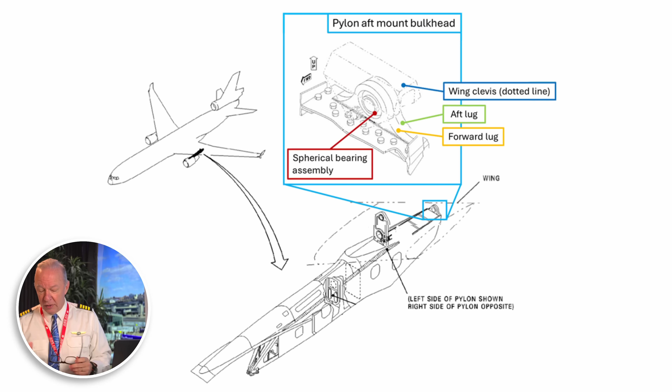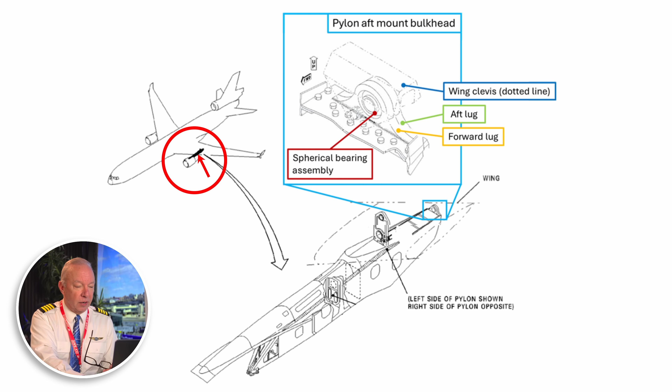Let's take a look here at the first diagram. And this first diagram is kind of the big picture. If you see the little airplane over here to the left, it shows you the left engine, and it's got kind of highlighted there the pylon that holds the engine onto the wing. Then there's a blow up of that pylon down at the bottom of the screen. What I want to focus in on is this thing in the blue box.

All right, it's a pylon mount bulkhead or aft bulkhead. And that round circle right there in the middle, right by where that little red dot is, that's where the bolt goes through, right? And they don't have this in the diagram, but the bolt goes through there, and you can't really see the wing clevis. It holds it on underneath the wing clevis and so forth, and underneath the pylon.

So you might say, why didn't they inspect this every flight? Isn't that something that the pilots would look at, or maybe the maintenance workers would look at? Well, the problem is all of that is covered up by panels. It's inside of that pylon, and so you'd have to unscrew everything and get into it. And there wasn't a need to inspect it every flight. Was there a need to wait 5 years? I don't think so. I think it should have been inspected more often than that. But again, hindsight's 20/20, right?

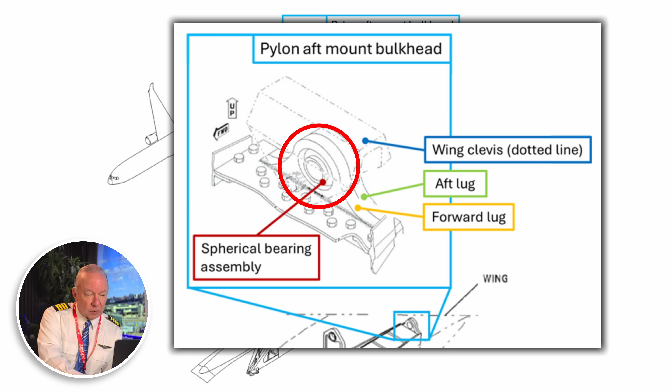So that's where the bolt went through, and this assembly around the outside of this spherical bearing assembly, that's what's in question. That race that goes around that ball element is what cracked, and it got fatigued, it cracked, and it came apart in 2 pieces.

Now, let's take a look at the next picture. This is the actual ball element, this thing in the middle that I'm discussing with you. You can see a little bit of old grease here at the top and at the bottom, but there's a groove right in the middle. And that groove in the middle is important to us because over here, this thing called the bearing race, if you will, see this little piece right here that's broken off?

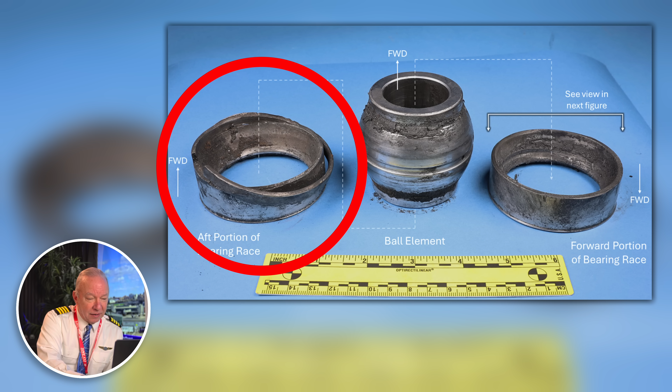This thing on the left side and this thing on the right side at one point had been attached. It's one piece, and it goes around, and this little piece right here that's broken off, that's the tongue that fit into this groove. And it all encompassed or housed that ball element inside of it. This assembly on the left and this assembly on the right were at one point one connected piece. The fracture started right down the middle of it, spherically, all the way around, and eventually it broke.

And due to the stress of the engine now coming off the wing, it broke enough that, from the overstress, it separated in 2, and then the whole assembly comes apart. When that happens, the bolt is no longer holding the aft attachment point on the wing. The engine, which is producing a tremendous amount of thrust, then pivots up on its own because it's trying to fly. It overstresses the forward attachment point, and then the whole thing goes kind of flying through the air up over the back of the airplane, FODs out the number 2 engine.

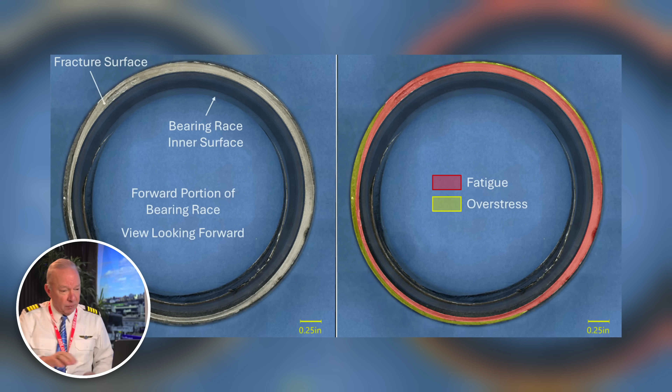All right, now that thing, it's very graphic to look at. I'm going to show you a little bit closer look now at that bearing race and what happened to it. Over on the right-hand side, they've got it color-coded for us. So the orange area is all the fatigue that happened over the years. And you're going to ask the question, why didn't they see this? I'll explain that in a minute. The next diagram is going to show you why they didn't see it. All that fatigue is cracked almost all the way around.

You can see the cracking is all the way to the outside here and all the way to the outside on this side, and it's on the inside in here. And the yellow is the overstress that happened when it finally let loose and that engine came off. So both this side and this side were attached to each other. You got to get that part.

They were one piece of metal, one hunk of metal at one point that went all the way around that ball element. Once that thing let loose, they were doomed. That engine wasn't going to stay on the airplane anymore. Now I'm going to read something to you here in just a second. But I want to get to this diagram because this is the important diagram. This one, it's all colored for you.

And you can see over here the bolt that goes through this. And you see the dots here, right? The dashed lines. That's that ball element with the bearing race that goes around it. Here is another look at it. Schematic view of it. There's the ball element. You can see how it looks here. Remember the grease here and the grease here.

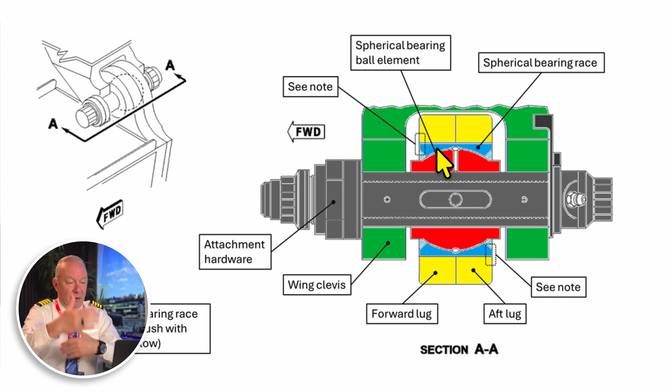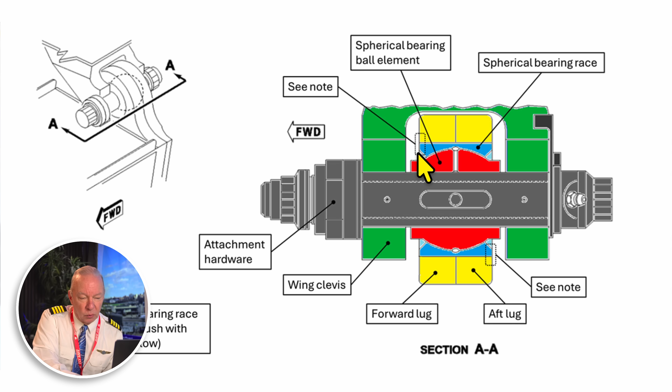This thing, this white line right here, is that groove that goes down the middle. And the blue part is that bearing race that goes all the way around it, okay? But they didn't put it all the way around because they wanted you to see what's underneath on the diagram. Now, the inspectors were told every 60 months to go take a flashlight, look in here with a scope, and see if there was any sort of migration, that's the word they use for it, or a protrusion of this bearing race right here. This thing is supposed to be out of sight.

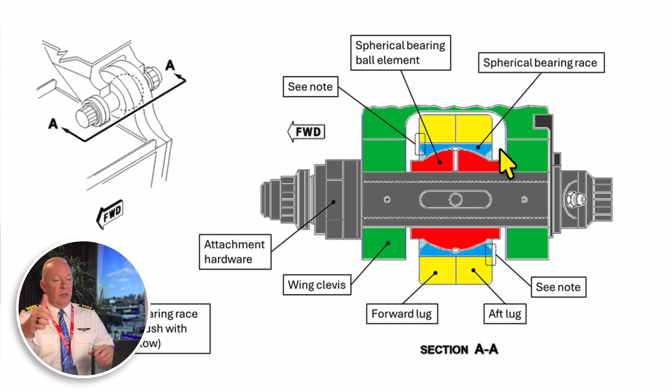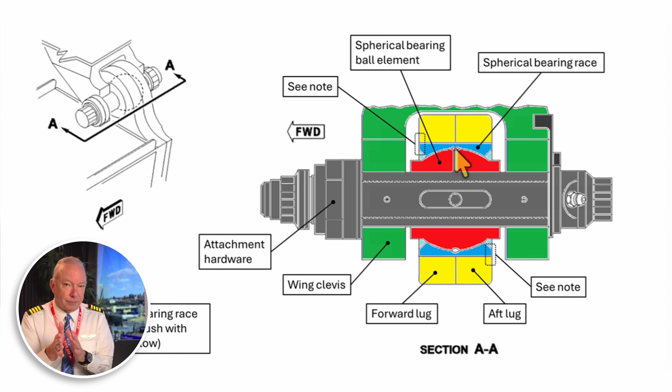So if you can look through right here, and you can look through right here, and you don't see anything, you're good to go. That thing is in place and it's intact. But if you can't see all the way through, or this thing is sticking out a little bit over here, or it's sticking out a little bit over there, there's only one reason for that. And that means somewhere inside here, presumably right there, it's cracked. And now you know you got a fatigue crack in there someplace.

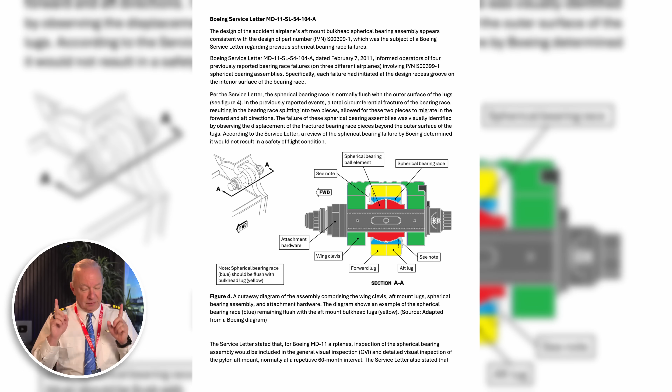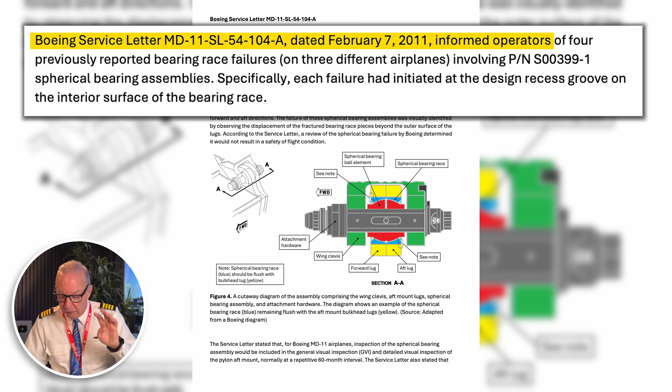Now you got to go take the whole thing apart. And Boeing suggested replacing it with a whole new part that didn't have that tongue and groove assembly in it. Now, let me read to you what Boeing said specifically here about this particular issue that they found. All right. Boeing service letter dated February 7th, 2011, informed operators of 4 previously reported bearing race failures on 3 different airplanes. That implies that one airplane had it on both engines.

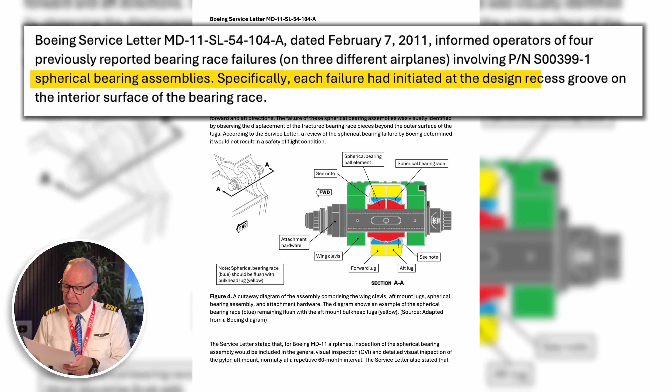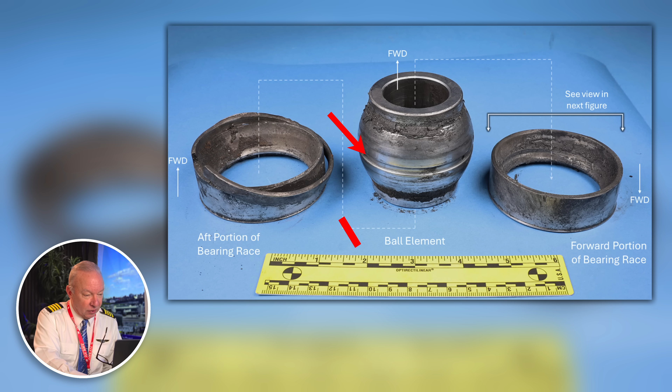Okay, on both sides. So there were 3 different airplanes where they looked and they saw this little assembly right here protruding, and they knew that it was a problem. So they opened it up, and sure enough, the spherical bearing assemblies had gone bad. Specifically, each failure had initiated at the design recess groove on the interior surface of the bearing race. That little groove that I showed you on the previous picture, that little groove right there, and this little tongue that went in it, that's where the fatiguing took place.

This is, in my opinion, a design flaw. You don't need the tongue and groove here. It's just something they designed it with. But with that tongue inside that groove, it creates a friction motion that can lead to the fatigue and the cracking. If that wasn't there, they wouldn't have that little pulling moment every time there was an adjustment in the engine. And over time, it just created a crack in the metal.

They got rid of that altogether in the new redesign, but they came short of saying later on that you had to replace every bearing on every airplane. They said, if you see it and you want to, go ahead and replace it. They left it up to the owners, UPS, FedEx, and the others, to make that decision on their own. And that's the delicate ballet that goes on between an aircraft manufacturer and the aircraft owner. It's kind of like your car and my car, right? You get maybe a 3-year, 36,000 mile warranty, or 100,000 on the major parts of your car.

And after that, you're kind of on your own. The manufacturer will come out with some ideas and some suggestions, but it would be on you to go out and get it done. And so there's some tension here between the culpability of UPS and the culpability of Boeing on all this.

And remember, Boeing didn't design this airplane. This was a McDonnell Douglas airplane. So Boeing inherited it, but guess what? Once you buy the company and you buy the airplane, you buy the liability and the responsibility for it. So having said that, they did come out in 2011 with a bulletin that said, take a look at this. They knew about it. They pointed it out, but they came short of saying replace it all.